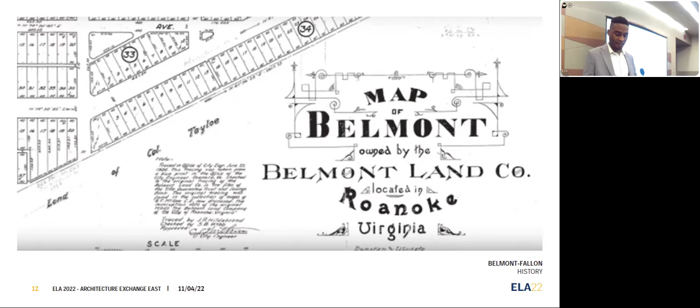Norfolk and Western's Roanoke was at the front line of exploring the frontier. The railroad became the staging ground for materials to and from the frontier. Founded in 1881, they built the buildings known as the shops, which employed more than 6,000 people in the 1930s. It was known as the Detroit of the railroad industry—they could build four locomotives and twenty rail cars a day. The J class was the most advanced steam engine ever built, equivalent to the Saturn V rocket. From 1927 to 1953, the shops built every steam engine for Norfolk and Western.

The American Viscose plant, established in 1917, grew due to the product called rayon, an artificial silk for short. It sat on 212 acres of land. By 1928, it had more than 5,500 workers, mostly women at 58%, because of the war. Thirty-five percent of all production came out of this plant—between 12 and 13 million pounds of rayon.

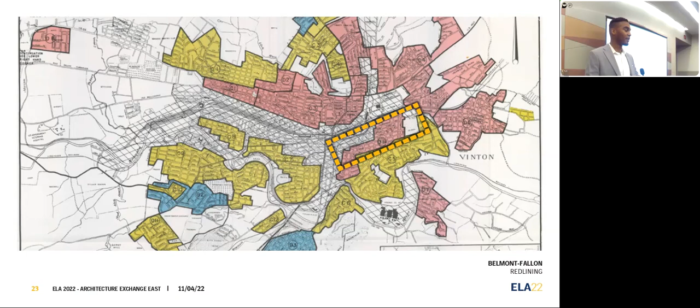Mapping is an essential tool to understand the neighborhood. It enables us to visualize the existing complex dynamics and various interrelationships present in and around the site. It also helps us derive the needs of the neighborhood with careful research and analysis.

The target area for this intervention extends from I-581 and Fallon Park from west to east and runs from Tazewell Avenue to Highland Avenue from north to south.

As we know from the introduction, Fallon is one of Roanoke's oldest neighborhoods, and it has its unique historical charm. When we experience a neighborhood for the first time, the most important thing that strikes us is often the way it looks, the streetscapes, the houses, and various contextual elements that together express a holistic character. This neighborhood is very unique in some important ways, with richness in history and past industrial development.

Let's dive into some details. Belmont real estate is primarily made up of small to medium-sized single-family homes and small apartment buildings, which typically range from tiny studios to 4-5 bedroom houses. At least 3/4 of these houses were built between 1890 and the 1950s.

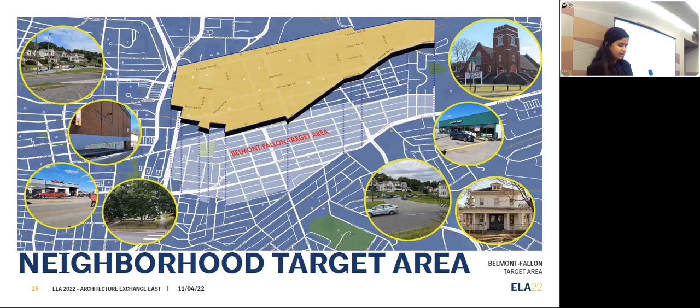The whole target area is about 200 acres in size, and we would be focusing on a few pockets of site across this neighborhood for design interventions, which eventually act as a catalyst that creates a huge impact on the community over time. So the next map is the figure ground map.

This diagram is a mapping technique used to illustrate the relationship between the built and unbuilt spaces in cities. The land coverage of buildings is visualized as solid mass, which is the figure, while public spaces formed by streets, parks, and roads are represented as voids, which is the ground.

The figure ground represents minimalistic information yet a highly important component towards understanding a neighborhood. The spatial analysis map can give useful information about the shape, scale, pattern, and density of buildings, in addition to the nature of spaces created between them.

This map especially summarizes the contrast between available open spaces and built spaces in the neighborhood. The available open spaces shown here could be a potential site for public and cultural infrastructures in the future.

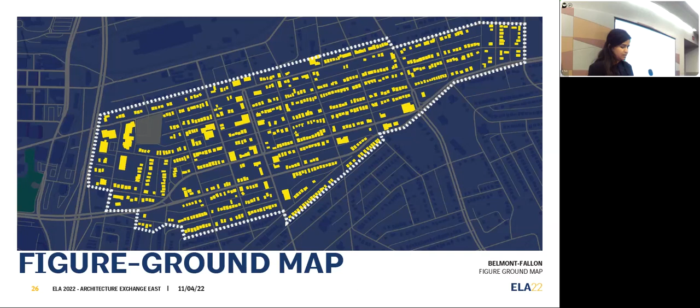So the next map: when working on any site, it is essential to understand the elevation levels, like how the terrain and landscape influences the existing condition, while also carving the decisions for future development.

We did an analysis on the existing levels in the neighborhood that interprets the flood-level-prone zones in the area. Taking this factor into consideration emphasizes the importance of open space planning, integrating well-designed stormwater management, and the need for adequate blue-green infrastructures in the neighborhood that control flood levels and reduce urban heat island effects.

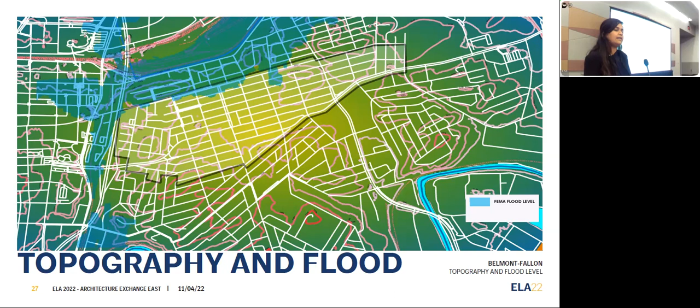Coming to map 4, this shows the transport system and connectivity existing in the target areas. This is a highly important factor in order to make a neighborhood active. This map represents the major thoroughfares used for commuting.

The Jamison and the Bullitt Avenue are one-way. These two are state roads crossing the neighborhood. The Jamison runs east to west and the Bullitt runs west to east.

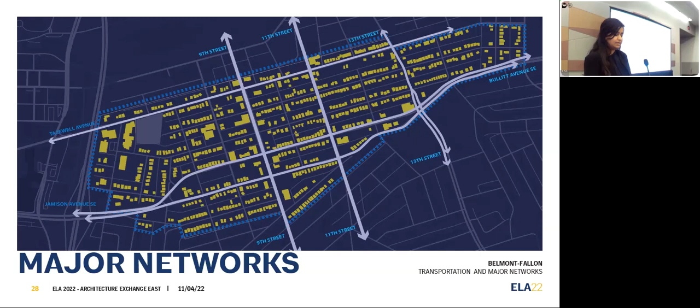The speed limit for these is 35 miles per hour in this neighborhood, but if we observe it, it is way more than that. So the existing networks work good for cars, but the need of the hour is to make it work for people.

In the next map, from geospatial data sets we were analyzing the land values and parcel values of the neighborhood. This map represents the value of built spaces in each plot. This value doesn't differentiate the typology of buildings, as the neighborhood typology ranges from commercial, retail, and housing.

This helped us to identify the influencing factors for development and the value of buildings around the neighborhood.

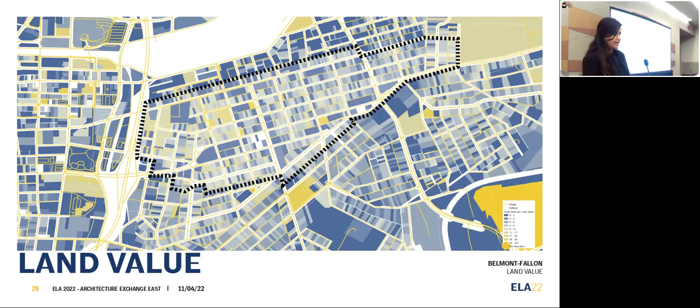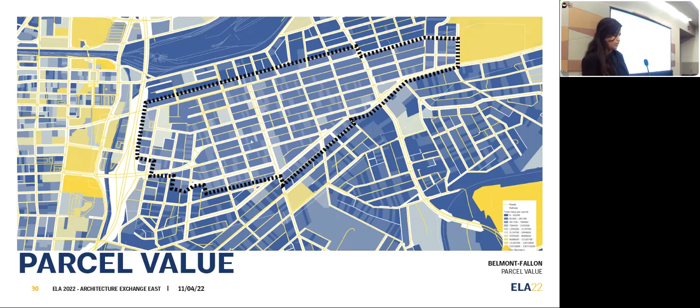In the next map, as most of the land divisions are almost of similar size, this represents the land value ranges in the project area. So we can clearly see the difference between the downtown and our Fallon community.

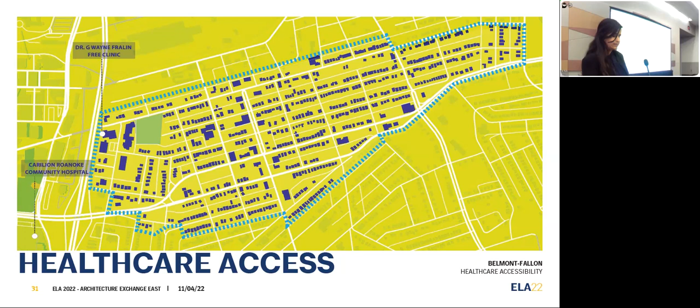This map shows the existing healthcare facilities in our target area. We thought this is an important factor to consider in the development, as the Belmont neighborhood is currently in a medically underserved area with only one health facility apart from the downtown Carilion clinic.

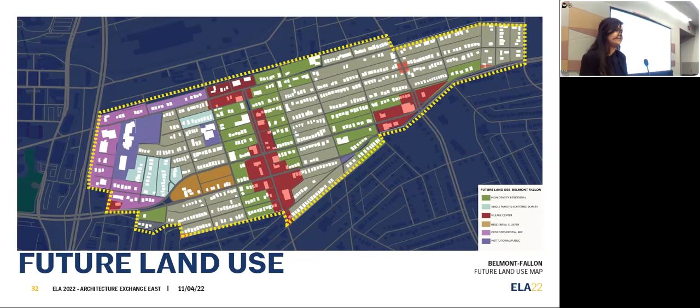The community boasts a range of employment types, with higher rates of blue-collar and service industry employment. It also hosts a higher unemployment rate when compared to the state of Virginia.

Belmont Fallon is located within Southeast Roanoke, which has been labeled both a food desert and a medically underserved area. This, combined with the high percentage of households without a vehicle, leads to many of the access struggles and the health needs as cited in the Roanoke Valley Community Health Assessment.

All of this data helps us understand how the history of the neighborhood has and continues to affect the residents of Belmont Fallon, and how we can best approach the needs, wants, and visions of the community.

Over the past year, our Emerging Leaders in Architecture program has had the pleasure of participating in multiple community engagement efforts geared at better understanding the Belmont Fallon neighborhood through the lens of its inhabitants. Throughout our various touch points with the community, we have listened, learned, and seen firsthand the outpouring of love that so many Belmont Fallon community members have for their neighborhood.

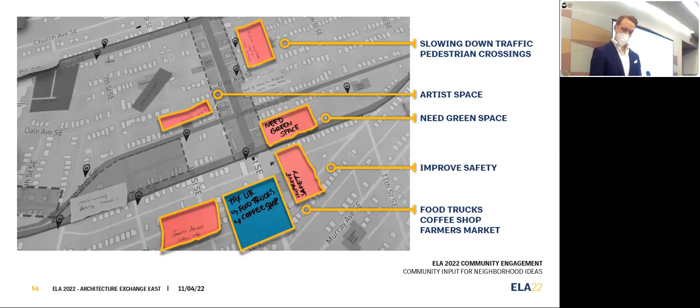We heard the need for increased safety measures, outdoor spaces, as well as the need for economic opportunities in this neighborhood. We are pleased to share how our knowledge of Belmont-Fallon's history, analysis of the neighborhood, and community engagement coalesced into the following design proposal for the Belmont-Fallon target area.

So it's a challenging question when you stop and ask yourself: what makes a community? Once we gathered all of this data and all of our experiences, which helped us interpret the data, we landed on the idea that we couldn't do this alone. And Belmont-Fallon itself couldn't do this alone.

This was going to be a cooperative effort between the city of Roanoke, the Belmont-Fallon community itself, and private corporations or support groups who are already dispersed throughout the community. So what we have here is a series of proposals that intentionally target those three categories.

We further broke this down into what we viewed as immediate impacts, immediate needs, and long-term visions. Immediate needs are things that address the food deserts, healthcare disparities, speeding in the neighborhood, and the accessibility for children to be able to move and get to know their own place.

The long-term visions are the things that we dream about. We all have to have that what if. Those beautiful drawings that all of the students and participants in our community outreach put together did not go unnoticed. There are things in here that are direct results of those dreams.

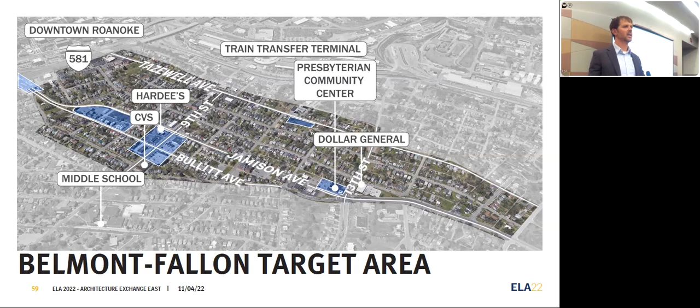And the last, the Presbyterian Community Center, it's kind of that tail end of the traffic between Bullitt and Jamison. We know that Presbyterian Community Center, since we've talked to them, is looking at establishing another facility. They're constructing a bigger building right next to it, which opens up that site, so we decided we'd be able to take advantage of that opportunity.

I want our neighborhood to feel safe and accessible by all. We met this young woman at iHeart Southeast Fest in July. She moved to Belmont-Fallon in the last 9 months with her wife and dog because they love the beauty of the valley's natural landscape. She also wanted to be part of a supportive community that would support her lifestyle, and she thought Belmont-Fallon would be the perfect place for a forever home.

Since she just moved to the area, we asked her what her first impressions of Belmont-Fallon were, and she said she loved the community and loved events like iHeart Southeast Fest, and would love to see more events like that.

When asked about the challenges she faced while living in Belmont-Fallon, she said she enjoys walking a lot with her dog and her wife. However, as a woman, she doesn't always feel safe walking around Belmont-Fallon.

The sidewalks are in poor condition in some areas. There's a lack of adequate street lighting for walking her dog at night, and a lack of crosswalks for crossing high traffic streets. We want this woman, as well as others in the community, to feel safe where they live by improving the infrastructure in this neighborhood.

And this woman we spoke to wasn't the only one who had an issue with safety in this area. Pretty much everybody we talked to, from the youngest members of the community to the oldest, kept saying the same thing: I don't feel safe walking in my neighborhood. So that was a major issue for us. We felt that was incredibly important to address.

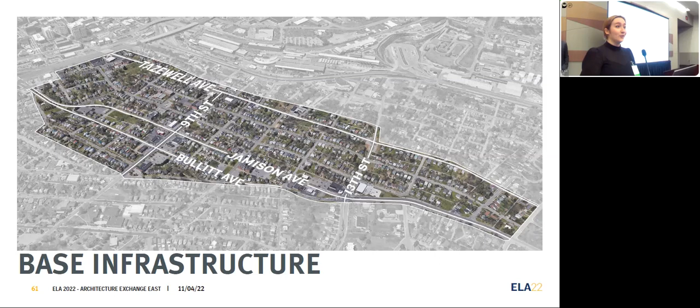People speed down those two roads that cut through this quiet residential area. So this is some current examples of what the area looks like. In this infrastructure section, we're addressing a few different things, from how people view Belmont-Fallon to how they can safely get through the streets.

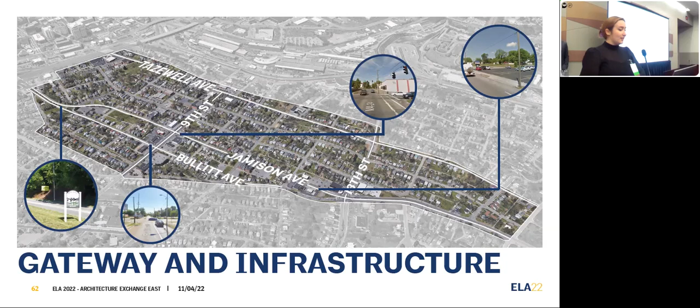One of the first concerns, we'd really love to put some raised crosswalks at specific intersections, specifically near the middle school and the library and the community center, places where vulnerable populations are most likely to be crossing the street.

It's difficult to put traffic calming measures onto a state road, but with the people that we spoke to, it seemed like targeting specific areas would give us the best argument to make these things implemented.

You can imagine when it gets dark earlier, especially in the winter, and there's children walking home from school around 5 p.m., it's dark outside, the traffic's going really fast. We want to keep these people safe. We want them to feel protected. So another way we want to do that is by increasing the lighting in the neighborhood.

There's a few of those really tall cobra head street lights. There could definitely stand to be a few more. We'd also really like to add those decorative sidewalk lights. Proper Roanoke, the city center, has these really lovely decorative street lights that help give the street an extra level of character, and so we'd like to take that same design language and bring it into Belmont-Fallon.

To help visually connect it to the rest of Roanoke, and then also we want to have some fun. So maybe some nice decorative string lights when we increase the landscaping along the street, just to make things feel livelier, more open, a little bit more pleasant.

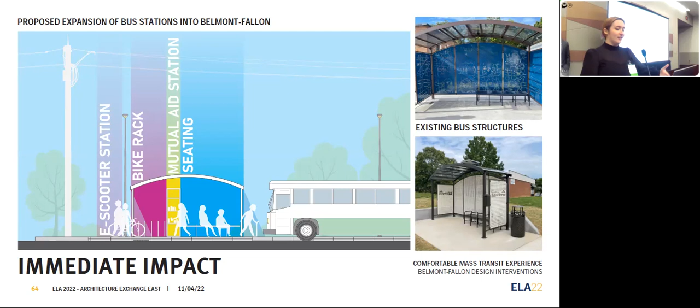So we'd really like to add these bus shelters that include bike racks and some of those e-scooters that have been so popular in downtown Roanoke, and then also using these shelters as a hub for a mutual aid station. You've seen those little libraries on the side of the road, or the little food boxes. So adding something here to make it more of a station for the community would be really helpful.

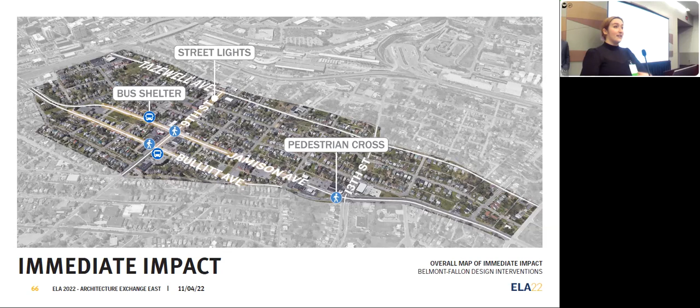And then this is a lovely little graphic of all of that together, bringing all of these things together to address the needs of the interior of the neighborhood, so that we can increase that safety.

And then as we move forward, we can then work on welcoming the rest of Roanoke into Belmont-Fallon. One of the ways we'd like to do that is by increasing the signage to really give Belmont-Fallon an identity. So a big, beautiful sign that says, hey, you're somewhere new, you're somewhere special. There's things here. We also want to have some historical signage that brings out that rich history that Belmont-Fallon has.

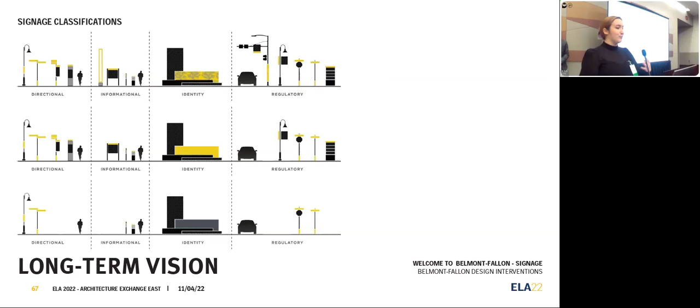So that the rest of Roanoke and other visitors can see and appreciate that. And then, of course, helping people get from point A to point B. As more things move into this town and there's more exciting stuff to do, we want people to be able to find that easily. So then we have a sketch of what we feel like Belmont-Fallon deserves to be recognized versus what it currently has, and we feel like we could do so much better.

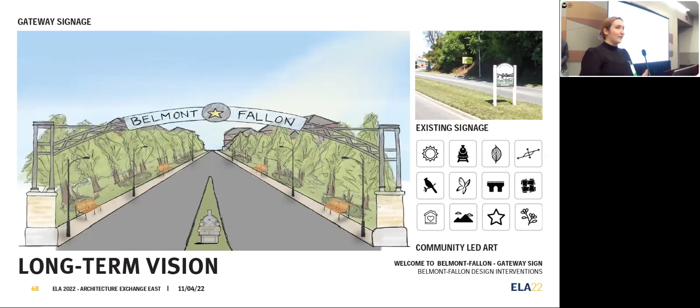So we want to connect these bike paths and add a greenway. It's also shown that when there's more bikers on the road, people tend to drive slower because they're more aware of the other people around them. So we think that could also add to the traffic calming measures.

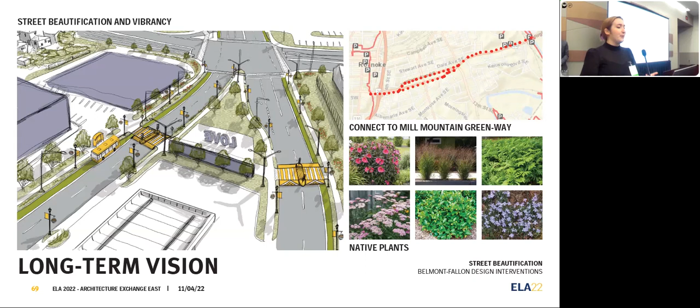And then, of course, we want to add more greenery to the sidewalk. Some different native plants that we can put along the road to make it a more lovely place to drive through, that encourages people to want to stop and see what's going on.

And then with all of that together, with our big welcome sign and our increased safety measures and our greenway, hopefully that sets Belmont-Fallon off on the right foot to then become an actual destination for others and a place that the neighborhood can really be proud of.

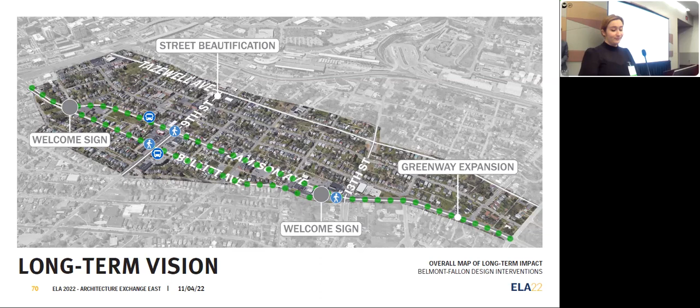So this is a testimonial from one of our ELA class of 2022 members named Preeti, who lives in downtown Roanoke and occasionally travels to Belmont-Fallon to shop at the closest CVS in the vicinity. Unfortunately, she couldn't be here today, so we will share her experience in her place.

As much as it is a pleasure walking around downtown Roanoke, it is risky to walk on the narrow sidewalks on Elm Avenue south of Elmwood Park to get to Southeast Roanoke. One random weekend a few months ago, Preeti decided to walk around the Southeast Roanoke area along Elm Avenue right across from Elmwood Park. At the time, she had no car and no destination in mind.

While she walked across the existing bridge that spans over 581, she was concerned for her safety. The sidewalk is narrow and there's a lack of a buffer between the sidewalk and the road. The bridge is prone to high traffic and congestion as cars and commercial trucks alike speed by as they enter and exit the highway.

As a pedestrian without a car, she felt very limited and unable to travel around Southeast Roanoke with ease. For our first site-specific proposal, we would like to propose a pedestrian and bike-friendly path to connect East and West Roanoke. As stated earlier, the addition of I-581 and Route 220 physically divided East and West Roanoke. This made it hard for folks to commute to and from downtown Roanoke and limited their access to valuable resources, such as the hospital and medical clinic located in West Roanoke.

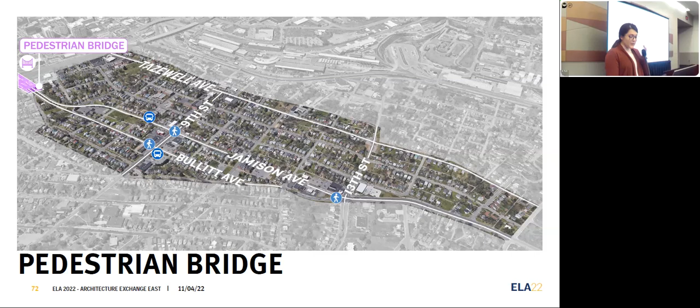When the current bridge on Elm Avenue was built over 581, it connected East and West Roanoke again. The bridge was a vital addition to Roanoke, and it became the busiest and most used thoroughfare in the city. However, the bridge doesn't support pedestrian and bike traffic to the fullest. Therefore, we would like to propose these immediate impacts that can be implemented by the city of Roanoke.

Some of the immediate impacts are as follows: improving the pedestrian walking path by creating a barrier between the vehicles and people, incorporating bollards or a concrete wall, adding sufficient lighting for pedestrian use, adding proper signage, refinishing existing crosswalks so they're visible, and adding green paint for shared vehicle and bike lanes. These immediate changes, no matter how small, will give residents of Belmont-Fallon a safer and more comfortable connection to downtown Roanoke.

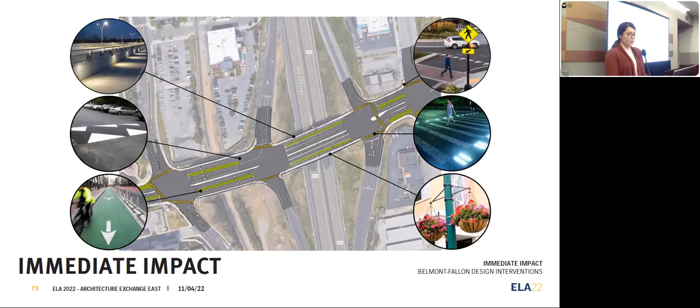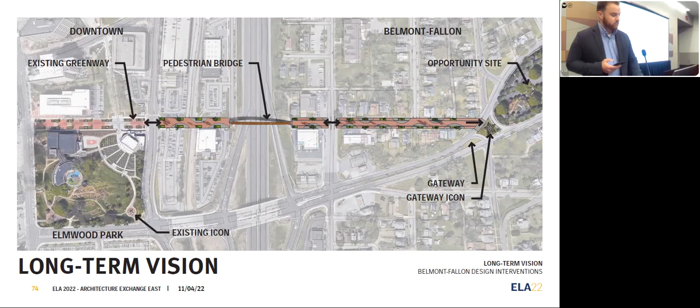I met this student at the Belmont Branch Public Library when we came to speak to them during their after-school program. She said, 'There are two parks over here,' pointing on the map to Belmont Park and Morningside Park, 'but there aren't any over here,' pointing to the middle of Belmont-Fallon. This bright student had an innate understanding that public space was missing in the middle of Belmont-Fallon.

While exploring the neighborhood, we identified a site between Bullitt, Jamison, and 8th Street that has a lot of potential for public space that could be created quickly for immediate impact for residents.

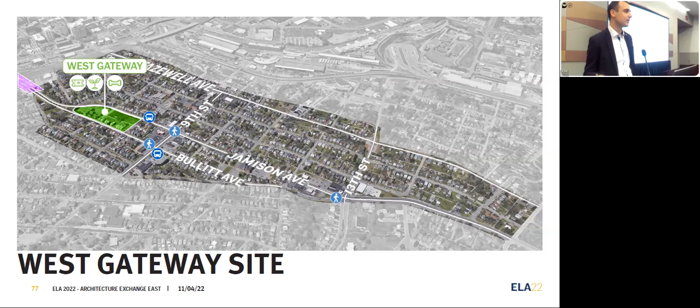It is mostly vacant at the moment, aside from 3 existing houses and a basketball court that already provides some community activity. This land is privately owned, and there are plans for future development. However, while those plans progress through the design process, we propose locating a temporary pop-up park here, built from low-cost movable materials and volunteer labor in partnership with local organizations.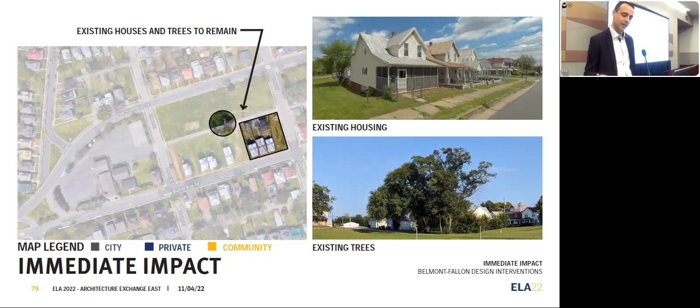To start off with the site, we propose preserving some of the existing elements, including the 3 houses still remaining on the site, the trees, and the basketball court.

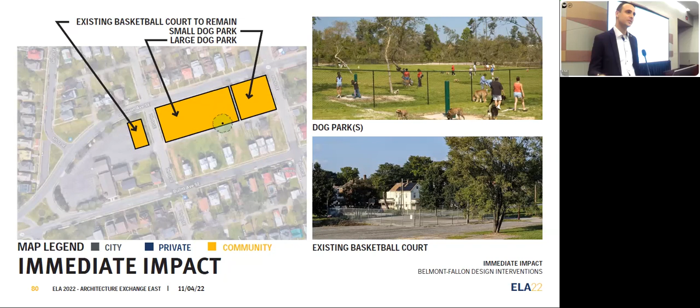The trees will provide shade for a dog park, which can be created with just a fence, a water fountain, and benches. It has separate areas for larger and smaller breeds, and we heard from many community members how much of a need there is for this type of space within the neighborhood.

The park could also include a community garden made from basic landscaping blocks, and an art garden with artwork and sculptures made by local students.

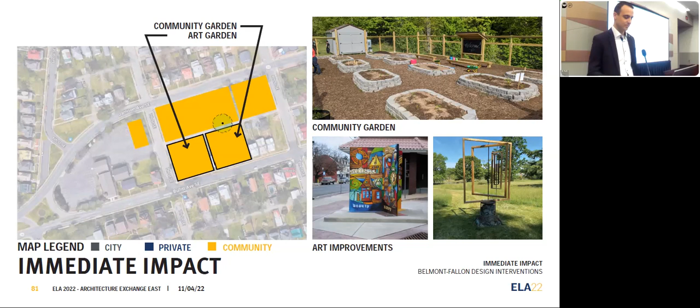The southwest portion of the site has a steep slope and makes for an ideal natural amphitheater to have outdoor movies in the spring, summer, and fall.

Painting the crosswalks with bright colors gives residents a safer path to the park and adds more artistic interest to the site. The paved area at the corner of Bullitt and Jameson would be a great spot for a skate park made from prefabricated modular components.

After the future development of the site, these components could be relocated to an alternate paved area somewhere else within the neighborhood.

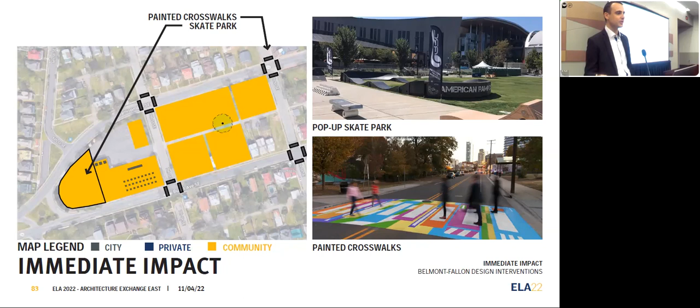Jumping into the long-term vision of the West Gateway site, we want to emphasize that we know this site is privately owned with the intention of developing it in the future. We just want to state that these ideas are our own and shouldn't be taken to represent the intentions of the owner, developer, or their design team.

While we hope these ideas may serve to inspire the developer to take to their team, they're in no way obligated to. That being said, since we know this site is a target for development, we felt the best way to present the long-term vision for this site was to show a future mixed-use residential development that could, over time, weave in some of the short-term spaces mentioned in the previous slides.

We believe this site can support a variety of scales of housing, mixing the traditional single-family homes of the existing neighborhood all the way up to the density of a mixed-use development, balanced out with space that could continue to be shared by the community.

The first thing we considered for the future vision of this site was to begin reestablishing the neighborhood scale of the block between 8th and 9th Street. This block used to be filled with rows of houses, and unfortunately, only 3 remain today.

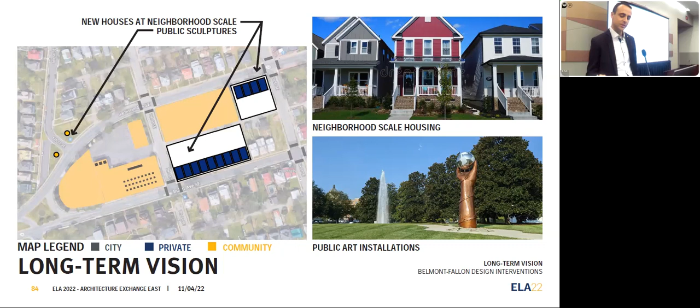We feel the opportunity exists to rebuild the homes on this block and reestablish the streetscape along Bullitt and Jameson, helping to restore a welcoming residential neighborhood feel. Adding public art installations in these small underutilized lots along Jameson Avenue will also help create interesting outdoor spaces for residents to interact with.

The next step is to create a neighborhood playground, decreasing the dog park in size to create a family-friendly environment where residents can bring their kids, dogs, or both.

Along with creating additional foot traffic comes the necessity to enhance safety measures. Considering the high traffic speed along Bullitt and Jameson, we are proposing flashing walk signals to make crossing these streets to get to the site less dangerous for pedestrians, which should also act as additional traffic calming measures.

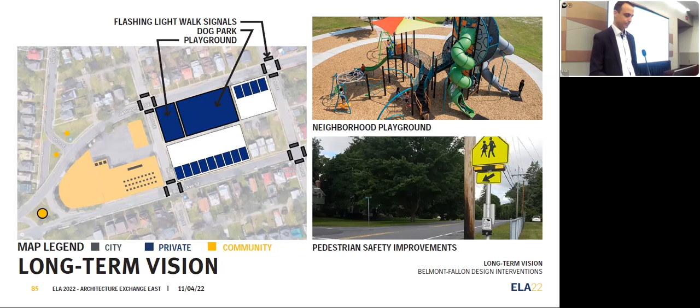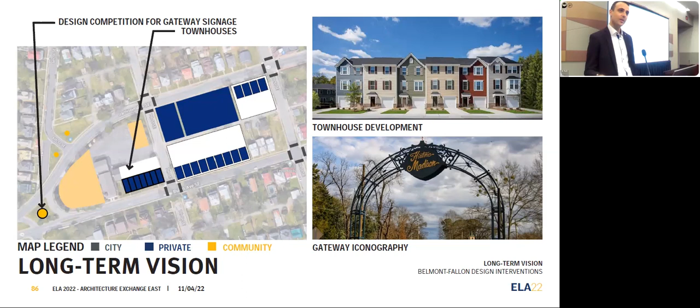Next, as we cross over to 7th Street and reach the portion of the site where Bullitt and Jameson converge, we can begin to introduce a little more housing density, starting with repeating the neighborhood feel and streetscape with a series of townhouses continuing along Bullitt Avenue.

Where Bullitt and Jameson converge, we are proposing a mid-rise mixed-use development. This will allow for more housing density, as well as provide services for the community, such as medical facilities on the ground floor of the larger building.

As you can see, we're continuing to preserve the open space that was created in the immediate impact phase, because we feel that's important for this development to be part of the community where everyone feels like they're allowed to come and spend time together.

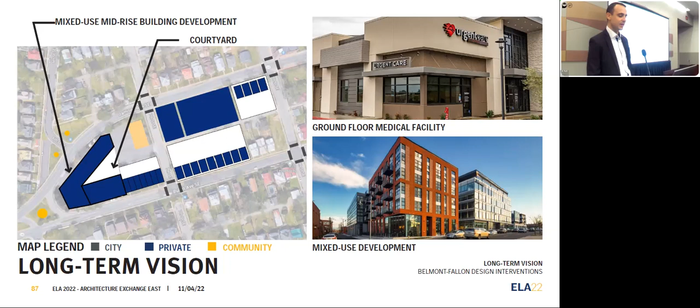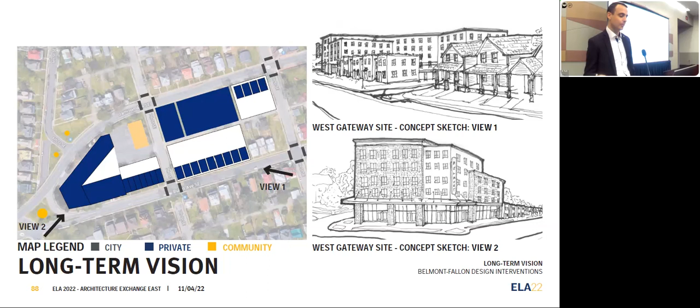This way, we believe the neighborhood can get some of the housing density that it needs, all while maintaining a residential scale that's welcoming to everyone in Belmont-Fallon.

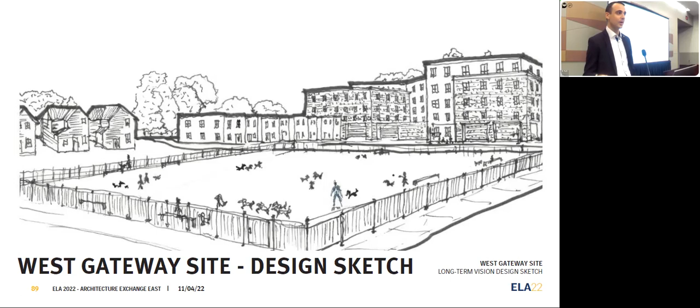When we talked to the students at the Presbyterian Community Center, this young lady said, "There aren't enough beautiful places in Roanoke because people destroy them. I like places where I can be quiet and reflective."

Near the intersection of Tazewell and 11th Street is a steeply sloped piece of land covered with trees and a small staircase. We think the community could use this place to showcase local artists, eventually becoming that contemplative space that young lady is looking for.

Right now, we can start small, collaborating with existing art-focused initiatives and paint the stair and retaining wall with colorful murals already located in the city. This would set the stage for artists to share their work.

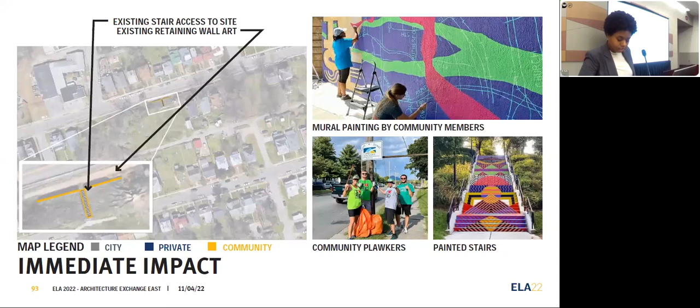Looking forward, the area can be transformed with a winding ramp that turns between the trees following the slope, making the highest viewpoint accessible to all. A sculpture garden can emerge along the ramp that people can view as they walk through, creating a meaningful and creative destination space on Tazewell.

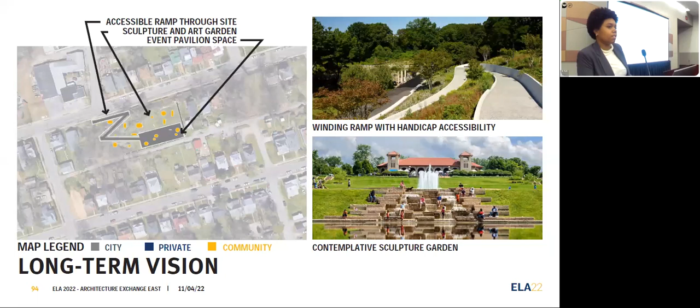Here's just an example of what that could look like in the future.

We had the pleasure of speaking to another primary school student during the Presbyterian community engagement with the youth. He said, "How good you describe a place doesn't matter if you come here and see it differently. It's important to not only listen to the youth but also attempt to see things from their perspective. Growing up in this community, there are not a lot of safe things for them to do. To have a group come in and say their community is great is harder for them to believe than to see the potential in their community."

This brought us to the Presbyterian Community Center site, located on the corner of 13th Street and Jameson Avenue. Here is the existing conditions of the current site. We know the community center will be developed in the future, with the relocation of this building moving to the west of the lot.

The immediate impact for the new location of the community center is shown in gray, with the existing parking lot remaining the same. Using that site, we decided to create a public garden incorporating features such as a Zen garden and sculptures and art from the community using recycled materials, so that it's low cost and minimal effort.

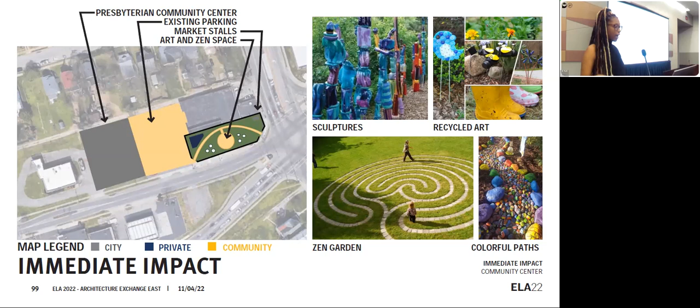The garden should still be enclosed with a gate or hedging landscape that creates a barrier from the street. On the right, you can see some of the initiatives and precedent photos we looked at, with colorful paths created with painted rocks from students, and recycled art made out of rain boots and bottle caps, along with other recycled plastic materials.

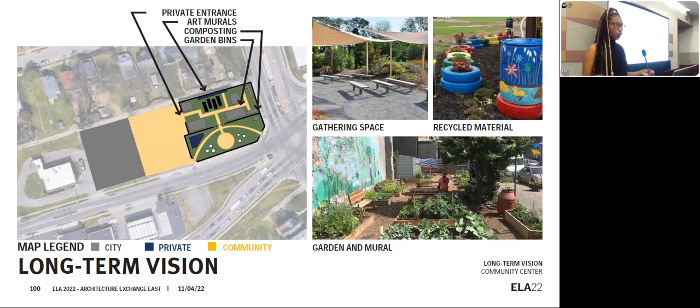For the long-term vision, we felt it was best to utilize the rest of the lot for a private community garden for the Presbyterian Community Center. This garden space would focus on expanding the gardening bins, allowing for more produce, market stalls, as well as a seating area for a gathering space. Behind that seating area could be a mural created for the public through local organizations. Here is our long-term vision of what that new proposed site could look like.

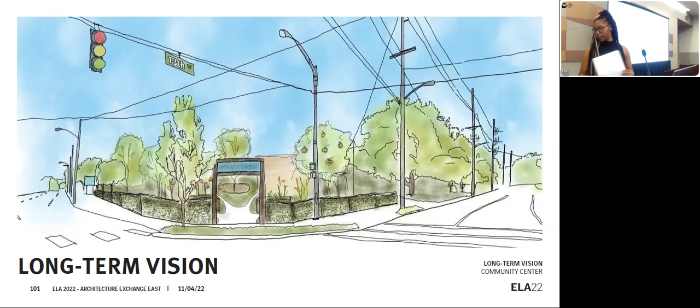Belmont-Fallon is unique and proud, but the issue of safety is holding the neighborhood back from reaching its full potential. The community wants to feel safe and secure. They want Belmont-Fallon to thrive. In order to achieve this, we need to cultivate safe spaces.

This brings us to the 9th Street corridor site. Shown on this map is the location we're proposing can be the thriving heart of the community. This targeted area is situated in a prime location between Jamison and Bullitt, with 9th Street intersecting.

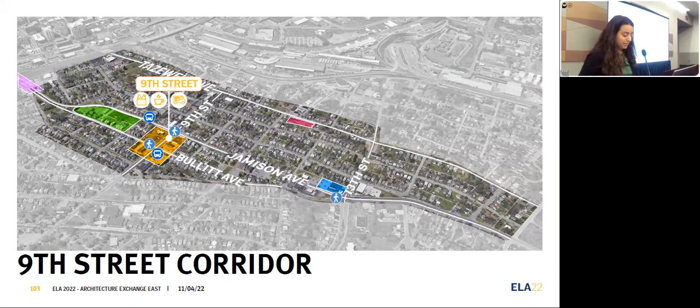Here's an aerial view of the site's current condition. You can see there's a lot of parking lots, empty space, and a general sense that you just want to pass through here. There's no draw or incentive for the neighborhood to hang out here since it's been affected by a lot of crime, which has unfortunately been getting worse over the years.

After asking the community what spaces they feel are missing in their neighborhood, we generated some ideas, both for immediate impact and long-term impact, to make this area a desirable and safer place to be. The ideas shown on this screen are the general immediate impacts we are recommending, and in the next few slides we'll get a better understanding of each.

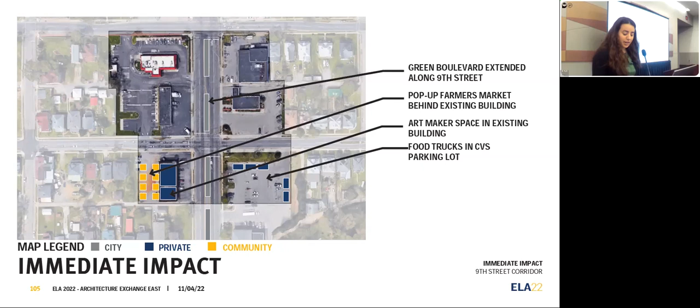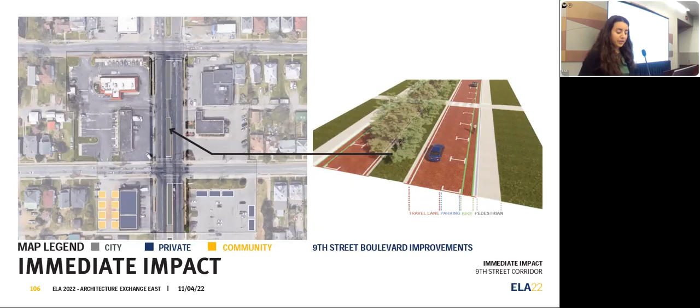Here we are proposing improvements to 9th Street Boulevard. We believe by improving the streetscape and making this boulevard pedestrian friendly, by adding trees and greenery, pedestrian walkways, crosswalks, bike paths, and slowing down traffic, more people in the community will feel comfortable coming here.

This slide shows the proposal for a temporary pop-up farmers market and a food truck spot. These temporary spaces serve to empower local entrepreneurs and farmers by providing a location for them to generate business and also provide for the community. Having access to a farmer's market close by in the neighborhood also promotes a healthy lifestyle, and having food trucks nearby encourages more people to come out and enjoy some food while supporting local businesses.

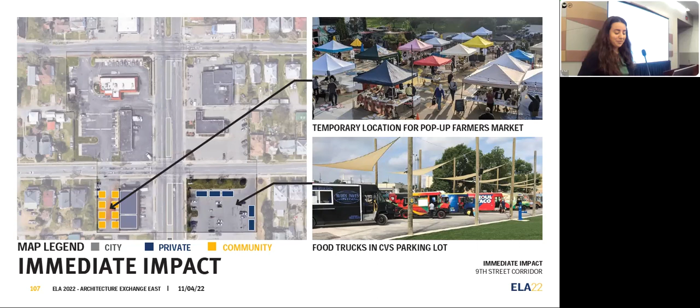Hopefully healthy as well. The next slide shows the potential for a community art maker space repurposed into an existing building. Darren, a community member we had the pleasure of meeting with, owns this building shown in blue, and supports this idea of an art maker space to encourage and promote the many artistic voices throughout the community.

Immediate impacts are important for re-energizing the community and giving the neighborhood a starting point for revitalization. We can start small and encourage growth and action, which will provide the platform for long-term impacts.

The 9th Street site is hot in the summer, desolate, and concrete as far as the eye can see. The long-term vision goal is to create a lively, active space through increasing green spaces, walkability, and revenue-generating opportunities for the community.

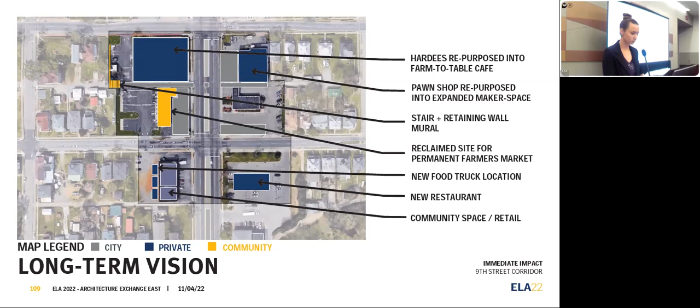On a reclaimed site, a proposed permanent farmers market is a key component. This includes a stretched fabric canopy using sustainable materials. A grass lawn adjacent to the market provides a space for live music and lounging.

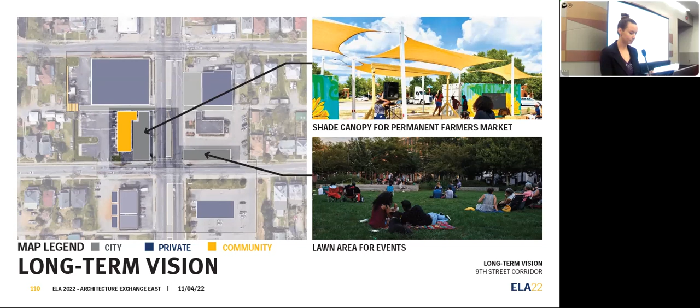If popularity and involvement in arts increases, a larger maker gallery space can be introduced. Due to topography, the neighborhood to the left and right of this 9th Street corridor are not connected, so we propose a communicating stair and mural wall to create the pedestrian connection that's lacking.

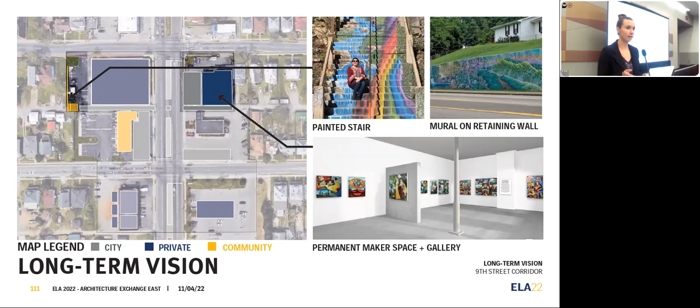We heard many requests from the community for more restaurants and coffee shops on their way to and from the city. We propose a farm-to-table cafe where patrons can dine among the plants.

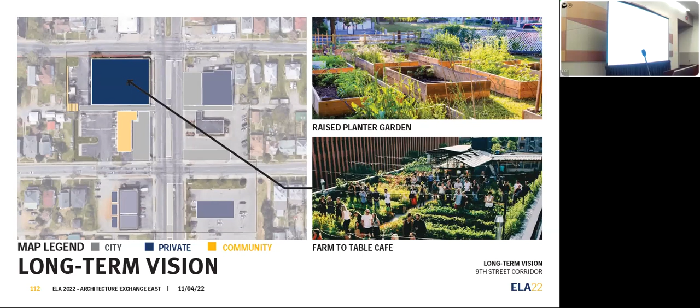In summation, the three biggest takeaways looking at the 9th Street corridor are lack of proper signage, no distinguishing elements at community gateways, and overuse of hardscape in comparison to green spaces.

Developing main gateways will not only improve the area aesthetically, but also enhance safety and communal access. Design solutions such as the implementation of green spaces to better organize the relationship between pedestrian and vehicular traffic will allow these places to become better areas for gathering and circulation in general.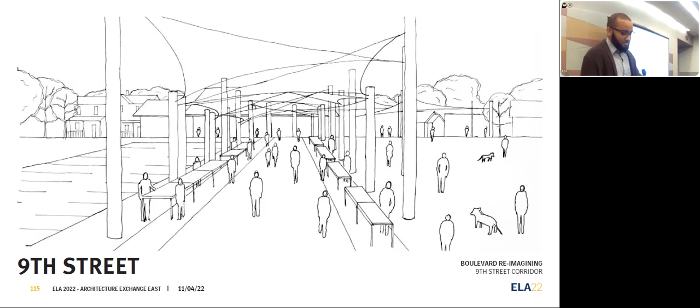All of these combine to create our comprehensive plan for Belmont-Fallon. Over the course of the year, we have looked at all kinds of information from data and fallen back on our experiences to help us understand this community.

Our task here wasn't to necessarily take what we thought a community was and impose it upon this area, but really to start to listen, to use our own experience and the experience of everyone around us in order to create informed decisions about what this place could be.

It's our idea that everything presented here helps strengthen the community. It helps provide safety, access to basic needs from food to medical care, to connections with the environment around them. And it also helps instill a sense of pride, something that the community can rally around and use to define themselves.

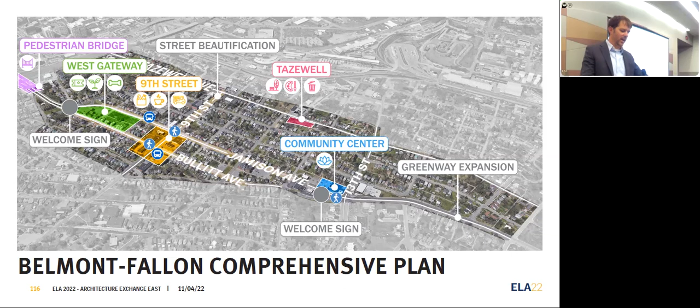Through that strength, it's our hope that the outside community will be further attracted to the area and help rebuild Belmont-Fallon, giving it a further identity and maybe a destination, someplace that its citizens can stand up and shout about. So thank you, everyone.